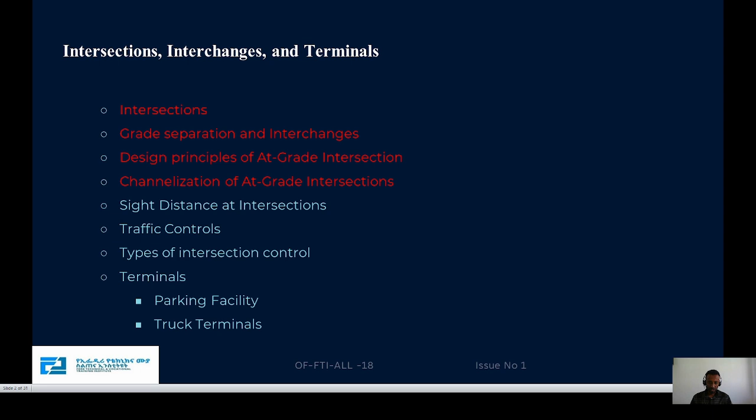Mostly we will deal with three types of channelization. The first is directional, divisional, and the last one is refuge. The rest of the topics will be covered in the next video.

So to start, we will deal with the intersection. An intersection is provided where two or more highways join or cross, including the roadway. Intersection is very important for a highway facility because it affects the efficiency, the safety, the speeds, and it is also very important for cost.

Mostly there is a delay because of the intersections, so the time spent is the first cost, and the second is that fuel consumption is increased. Also, the capacity of the facility depends on their design. Such movements may be facilitated by various geometric design and traffic control, depending upon the type of intersection

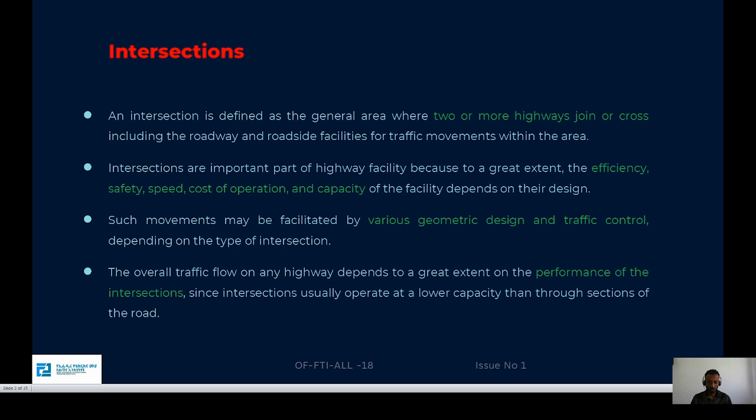provided. The overall traffic flow on any highway depends to a great extent on the performance of intersections. If the performance of the intersection decreases, the overall traffic flow will decrease, leading to high fuel consumption, high cost of operation, decreased capacity, decreased speed, and decreased safety. Generally the overall traffic volume is not effective.

General design considerations and objectives will be dealt with. The main objective of intersection design is to facilitate convenient, easy and comfortable travel in the intersections, enhancing the movements of motor vehicles, buses, trucks, bicycles, and pedestrians. Intersection design should fit closely to the natural transitional paths and operating characteristics of its users.

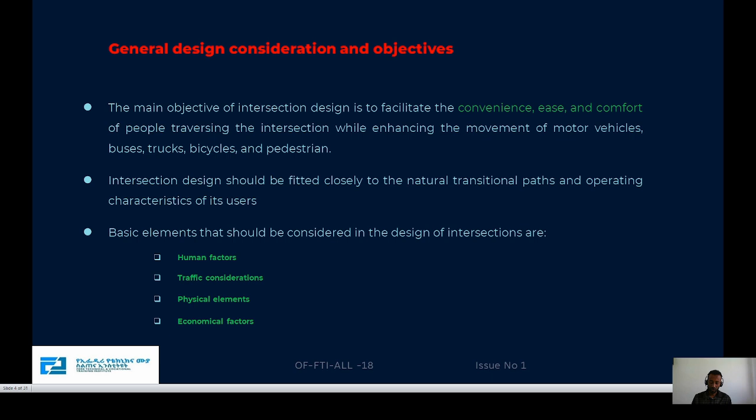When we design intersections, very important elements will be considered. The first is human factors, and traffic considerations will also be considered. The physical elements as well as the economic factor are very important for the design of the intersection. For example, we will list each of these factors.

Human factors are related to driving habits and the ability of drivers to make a decision. Driver expectancy will also be considered. For example, when cities mostly use roundabouts, drivers will always expect the next intersection to also be a roundabout, so driver expectance is considered. Decision and reaction time are also very important, and pedestrian use and habits will also be considered.

The second one is traffic consideration, also very important for the design. The design and actual capacity are related to the traffic volume, so we consider the number of vehicles in the design. The design hour turning movement is very important, so we count the volume of traffic with their turning.

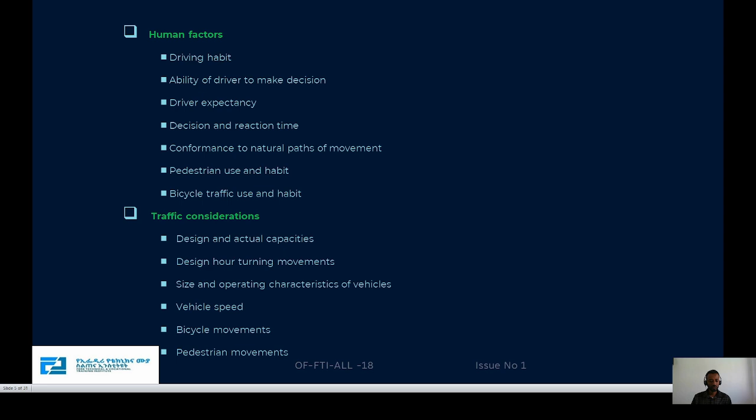For example, through movement, left turn, right turn, or U-turn will be recorded corresponding to the volume, and the size and operating characteristics of vehicles will be considered. If the vehicle size, length or height, is very high, for example the diameter of the intersection will be increased. Also vehicle speeds, pedestrian movement, and bicycle movements

will be considered in the design, and also the physical characteristics of the intersection. The first one is vertical alignment at the intersection. Mostly the vertical grade is not more than 3%, so that it is visible, and sight distance will also be considered. It is very important for at-grade intersections, which mostly require higher sight distance, while for grade separation no or little sight distance is required.

So depending upon the intersection, the sight distance will be related. Angle of intersections is very important. Mostly the intersection angle recommended in the Ethiopian manual, the ERA manual, will be 90 degrees, not acute angles. Conflicting areas also will be considered. The speed change lanes also will be considered.

The geometrical design features, the diameter, the number of lanes, the lane widths, all the geometric design also will be considered. The traffic control devices, for example signs and signals, green, yellow, red, controlling devices will be provided. Lighting requirements, safety crosswalks also will be considered, and lastly the economical factors will be considered.

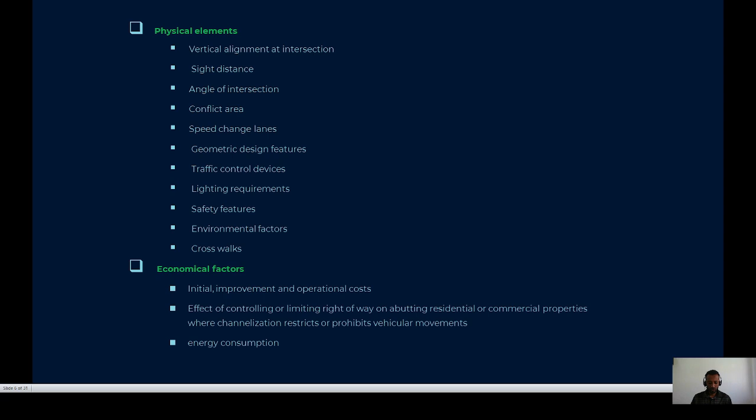The initial improvement and the operational cost are very considerable in the design. For example, at grade intersections, how much initial cost and operation costs will be calculated, and also effects of controlling or limiting right of way in the residential as well as commercial properties, and also energy consumption will be considered.

Intersections will be divided in three main general categories: at grade intersection, grade separation without ramps, and the third one is with ramps. Grade separated intersections mean there is a grade difference between the upper highway and the lower highway. So these intersections consist of structures that provide for traffic to cross at different levels, with a vertical distance, and without interruption.

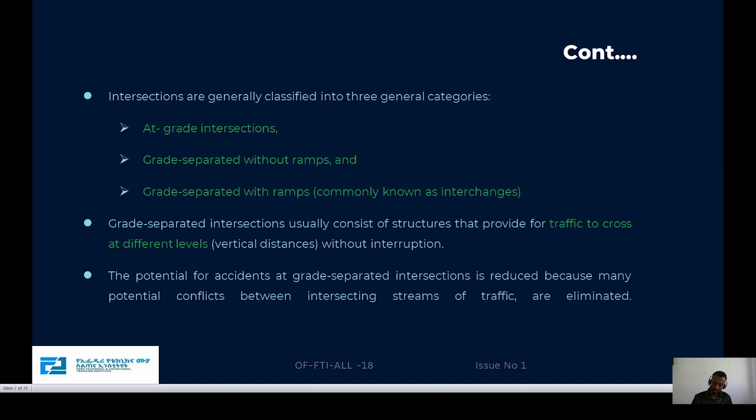The potential for accidents at grade separated intersections is low because they reduce or eliminate the potential conflicts. The potential conflicts lead to accidents. These potential conflicts are merging, diverging, and the third one is crossing. So in grade separated intersections, those potential conflicts are eliminated.

Grade separation will increase the performance, and also at grade separated intersections the accident prediction is very low, because compared to at grade intersections, there is eliminated or low potential for accidents: merging, diverging, as well as crossing potentials. And also the selection depends upon the particular site conditions, for example related to the capacity, delay, safety, and physical layout factors.

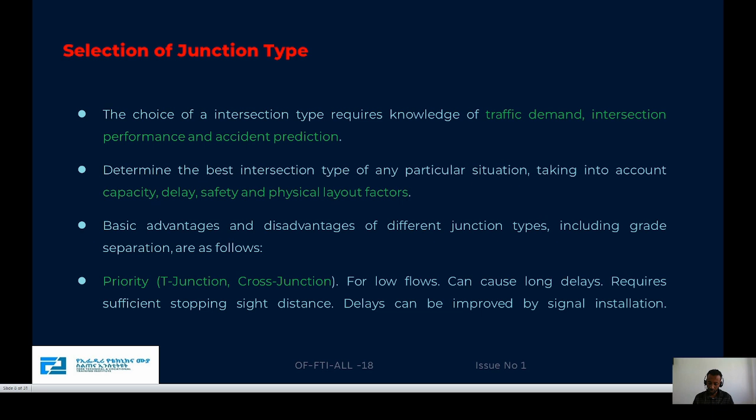Basic advantages and disadvantages of the different junction types, including grade separation. All intersections have their advantages as well as disadvantages. The first is priority. T junctions and cross junctions are mostly used for low volumes, can cause long delays in priority roads, sufficient stopping sight distance is provided, and delay can be improved by signal installation. So mostly we have those types of intersections.

The second one is a roundabout intersection. A roundabout is mostly for low up to medium flow, with minimum delay at low flows relative to the priority junctions, and good performance in safety. Grade separated intersections will be used for a high number of traffic, with minimal delay, and good safety relative to the priority as well as the roundabout cases.

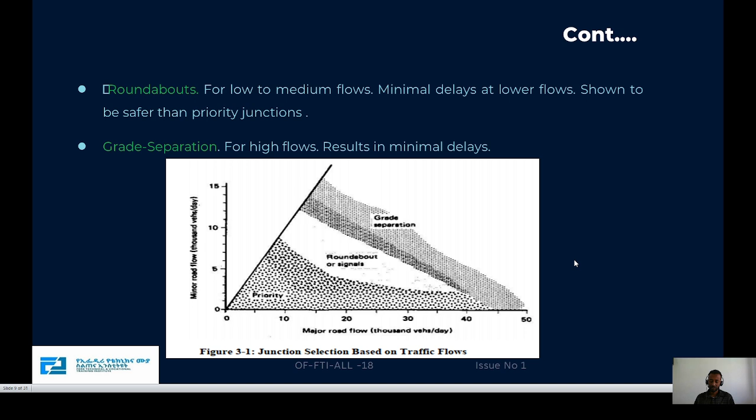At grade intersections means there is no grade separation, so all the legs are corresponding on the same elevation. These at-grade intersections are provided adequately for turning and crossing movements, considering sight distance, signs, and alignments.

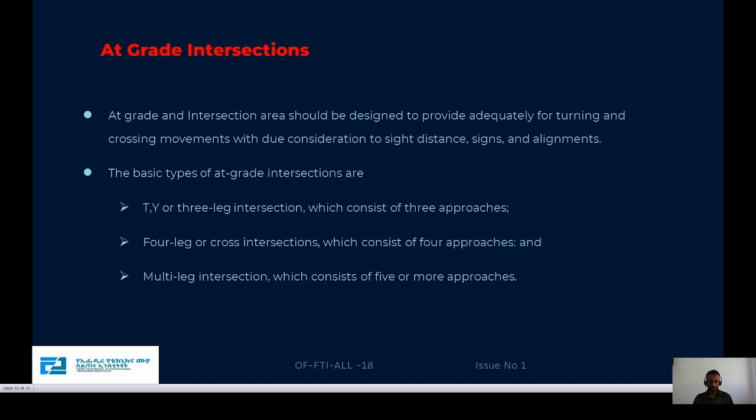Basic types of at-grade intersections are T-leg intersections, four-leg intersections, and multi-leg intersections with 5 or more approaches. This one is an example of at-grade intersections.

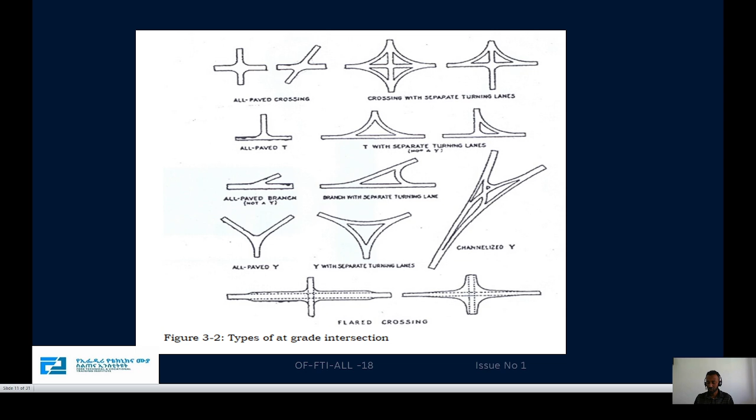This junction is a T junction, Y junction. These types of junctions are all at the same elevation, the vertical alignment not more than 3%. Grade separation means there is a grade separation structure, or a vertical distance.

This is important, for example, as part of an express highway system for carrying high volume of traffic. It is very important to eliminate bottlenecks.

Mostly in Ethiopia, the experience is that the intersection roads will be wider, so as we approach the intersection, the lane widths will be decreased, and this mostly creates a bottleneck. So in grade separation there is no bottleneck structure.

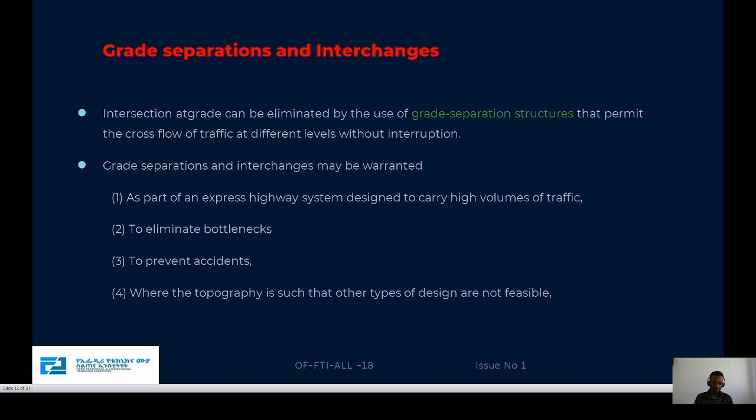Also, to prevent accidents, in grade separation there is elimination of conflicts, so there are no accidents. Also, the topography may be such that other types of design are not suitable.

Mostly the topography naturally has a difference in elevation, so we provide a grade separation. Grade separation is also provided for high traffic volumes. The last part is for road user benefits, decreasing delays related to safety.

It is also related to cost minimization. Grade separation is very important.

This grade separation is mostly differentiated into two types: with ramp and without ramp.

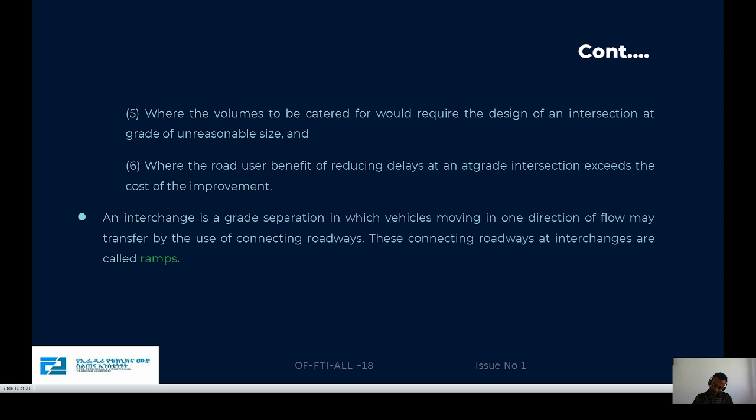These ramps will be connecting roadways at the intersection - there is a ramp structure. Without ramp, there is no connection; the first road is up and the lower road is at lower elevation, so there is no ramp structure.

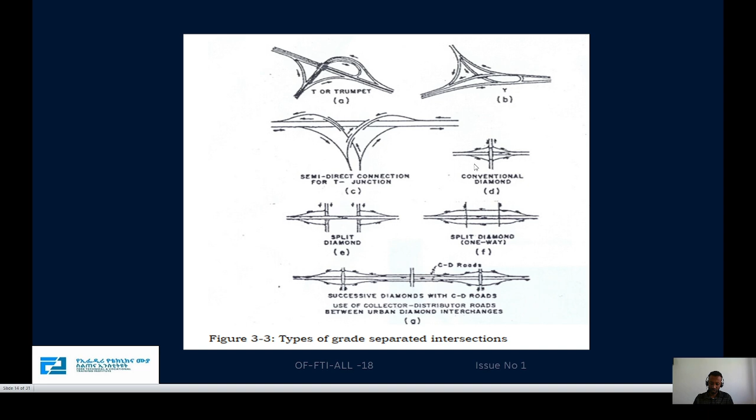These are all types of grade separation. For example, this one is with a ramp, this one is without ramp, so these structures are grade separation. Also very important are the design principles at grade intersections.

In designing at-grade separation, the first objective is minimizing delay, and also the number and severity of potential conflicts will be decreased. It should also provide smooth flow of traffic across the intersection.

It should ensure adequate pavement widths of turning roadways, which is also very important. And the sight distance is very important.

The basic requirements of intersection design are maximizing safety and minimizing delay. This design at intersections considers first the design of the alignment, including profile.

It also considers the minimum radius, the width of the turning road, and the design of suitable channelization systems.

Providing the channel system is very important for increasing safety for pedestrians, and also it is very important for left turns.

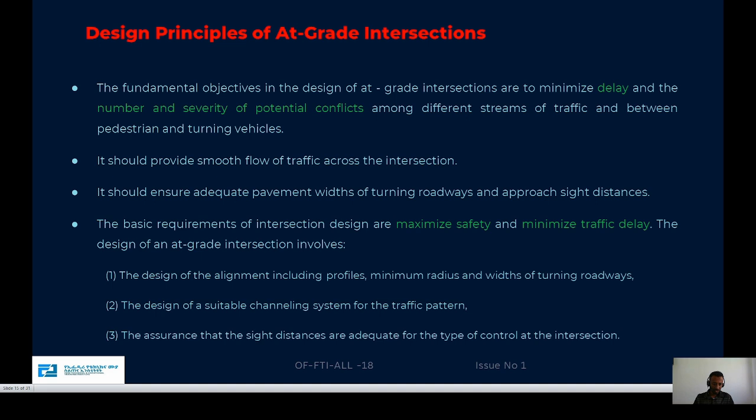There must be assurance that the sight distance is adequate for the type of intersection control. The alignment will be related to the at-grade intersections.

The best alignment at a grade intersection is roads meeting at right or nearly right angles. Mostly intersections should provide 90 degrees, avoiding acute angles. The vertical alignment at a grade intersection should have a very small grade, not greater than 3%.

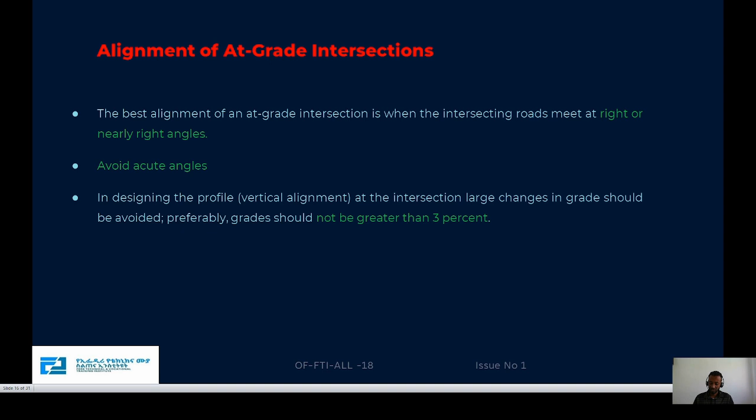Also consider the vertical and horizontal alignments. Intersections should produce traffic lanes that are clearly seen by motorists at all times, so the approach to the intersection is very clear.

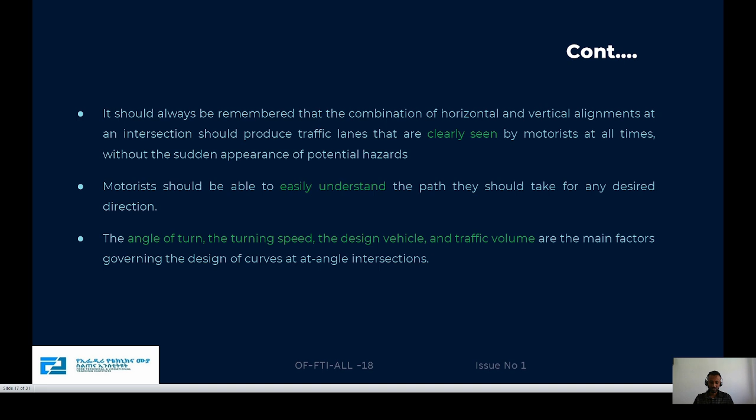Motorists should be able to easily understand the paths, not complicated for drivers. Also, the angle of turn, turning speeds, design vehicles, and traffic volumes are the main factors governing the design of curves at intersections.

Mostly recommended alignments: the first one is the previous alignment which has an acute angle, so we realign it with these paths, making it 90 degrees or nearly 90 degrees - this type of alignment should be used when possible.

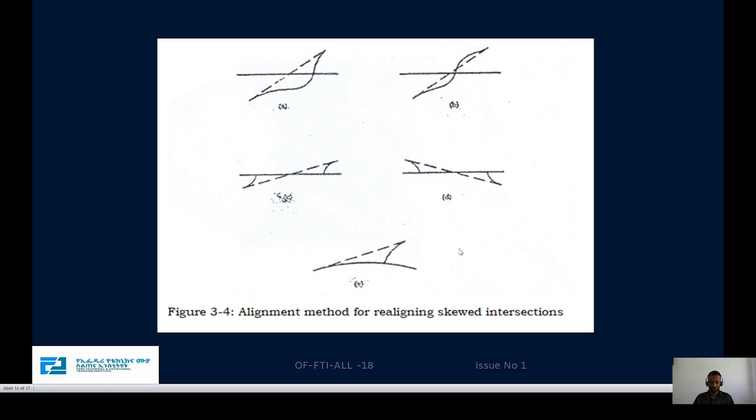The first is this one, this is acute, so to avoid the acute angle we have provided this one for this intersection. So we have used the suitable alignment requirements for use at a grade intersection.

As an example, an at-grade intersection is a roundabout. This roundabout is a one-way circular system around a centralized island. The entrance will be controlled by placing road markings or signals, and also will provide signs. A circular sign will be provided for the roundabout. The priority is given to the traffic already in the roundabout.

Roundabouts provide high capacities. They are used for low to medium traffic volumes with minimal delays and a good record in safety. Also, the general layout of the traffic.

The roundabouts should provide the following: adequate entry widths and also adequate circulating spacing. The centralized island's diameter is sufficient, and this will be related to the vehicle dimensions, and also a simple and clear layout.

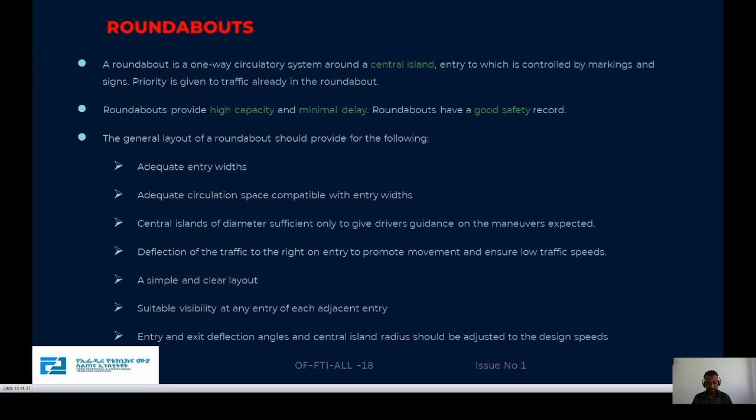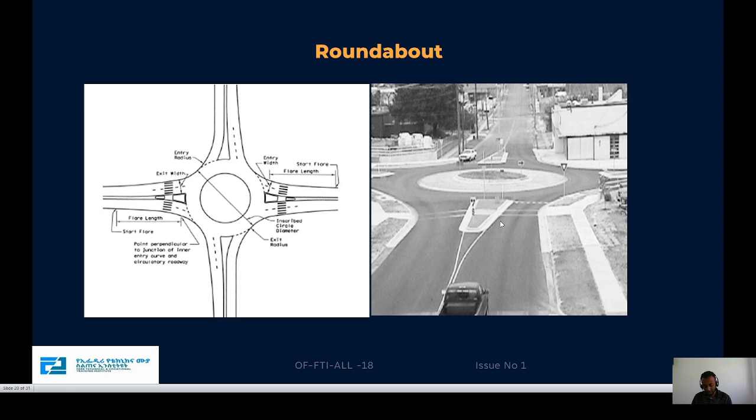The last topic dealt with in this video is channelization. Channelization is used to separate or regulate conflicting traffic movements, and this will be achieved by traffic islands or pavement marks to facilitate safety and orderly movement for vehicles as well as pedestrians.

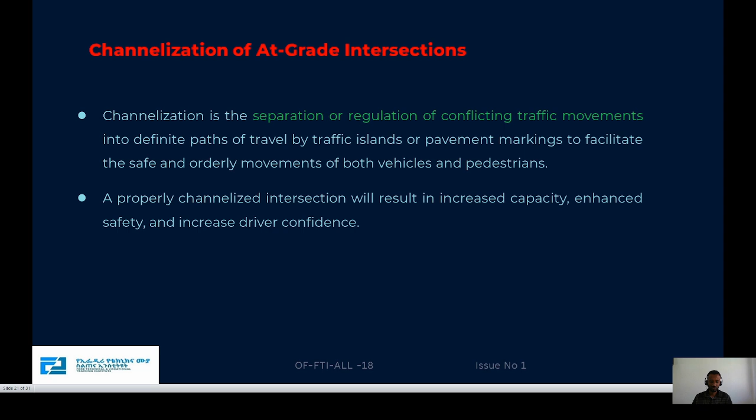Proper channelized intersections will increase the capacity because of decreasing the left turning vehicles, enhance safety by decreasing diverge and merge conflict potentials, and also increase driver confidence. So this channelization is provided before entering the intersection to decrease driver conflicts.

Channelized islands generally are included in the intersection design for the following purposes: the first is separating or decreasing conflicts, control of the angle of conflict is also very important, and also reducing excessive pavement areas.

Before entering the intersection there is a right turn, so because of this the reduction of pavement areas at the intersection will be decreased. Regulation of the traffic flow in the traffic sections will increase capacity, safety, etc.

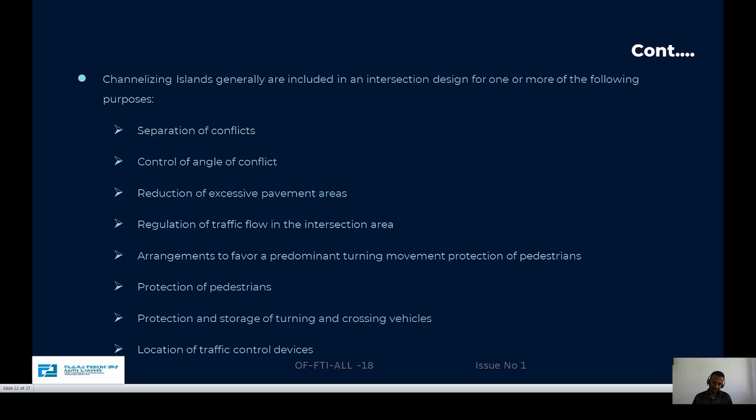Also, protection of pedestrians is very important, and also protection and storage for turnings, and lastly it will also provide a place for traffic control devices such as signals or signs. This channelization is formed by using raised curbs, pavement markings, or pavement edges.

There are generally three classifications of channelization. The first is directional islands. The primary purpose of these is to guide the traffic through the intersection by indicating the intended routes. It is very important for left turns.

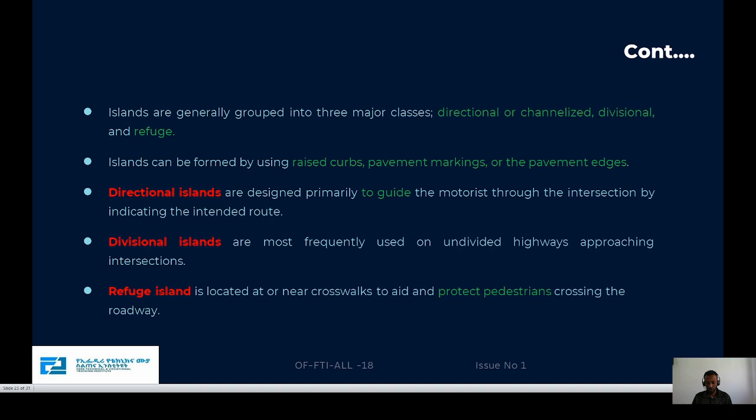Divisional islands are provided for undivided highways, used to divide the two directional traffics. Refuge islands are located near crosswalks, and their aim is to protect pedestrians crossing the roadways. Those are examples of channelized islands.

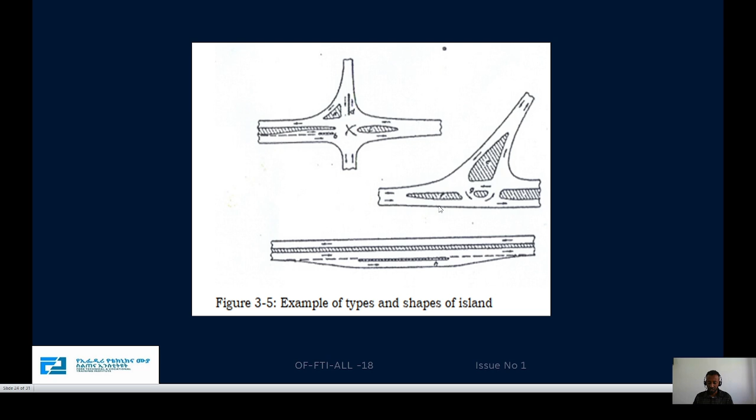So this one is divisional, and this one is directional. The divisional one is also shown here, and this is directional, for the traffic.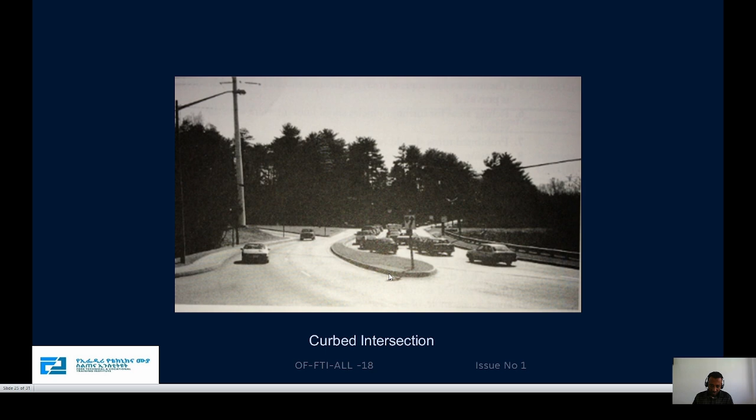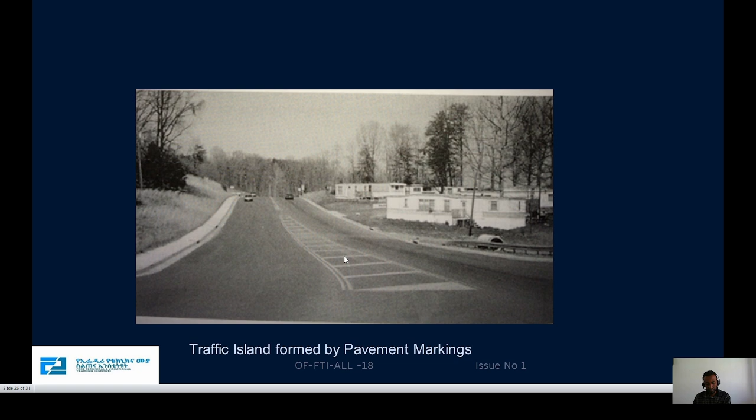This type of island can be formed by using a raised curb as one type, or the other type is by using pavement marking. This second part shown here is a channelized island, a directional island.

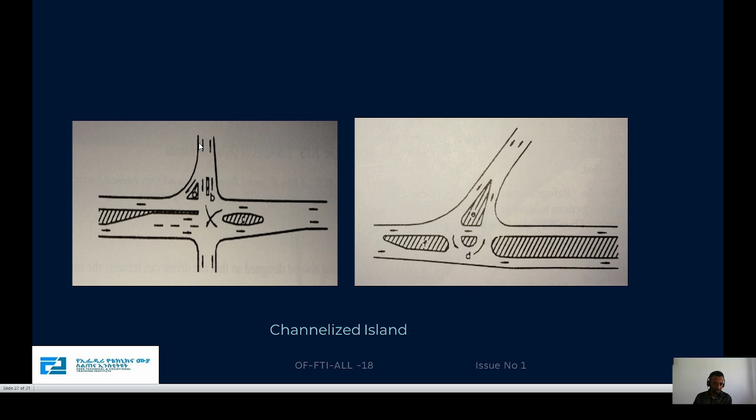When traffic comes from this direction, it turns into this direction. Without a channel, the vehicles will come in this direction entering the intersection and turn to the right, which decreases the capacity of the intersection and also decreases safety. So providing channels for turning right increases capacity and safety.

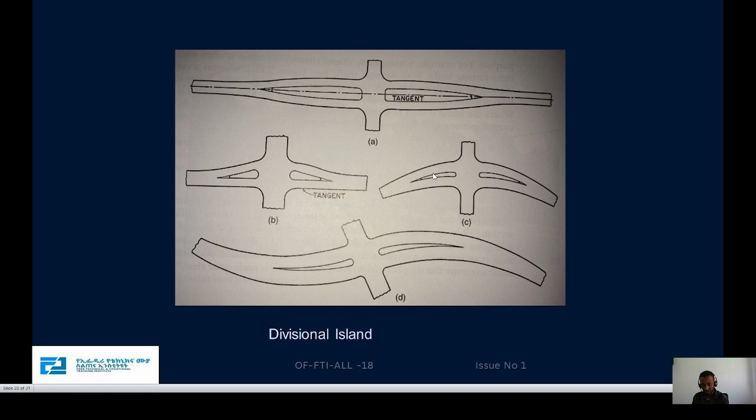This one is divisional, dividing the road into two parts. In this structure, the different traffic streams will be divided, as with a median for divisional islands.

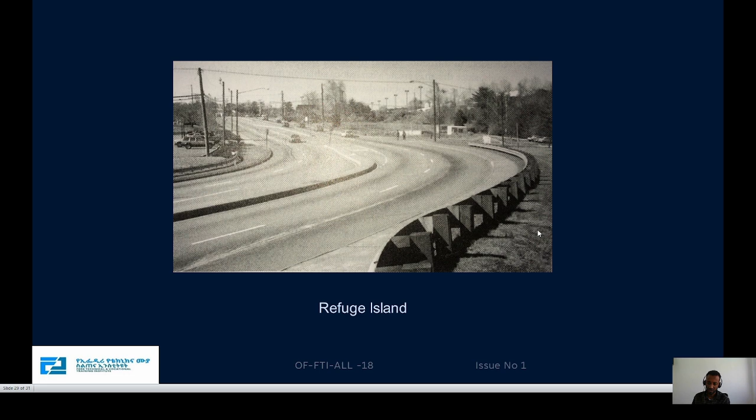The third one is refuge islands, which are provided for protection of pedestrians. Thank you for watching my video.